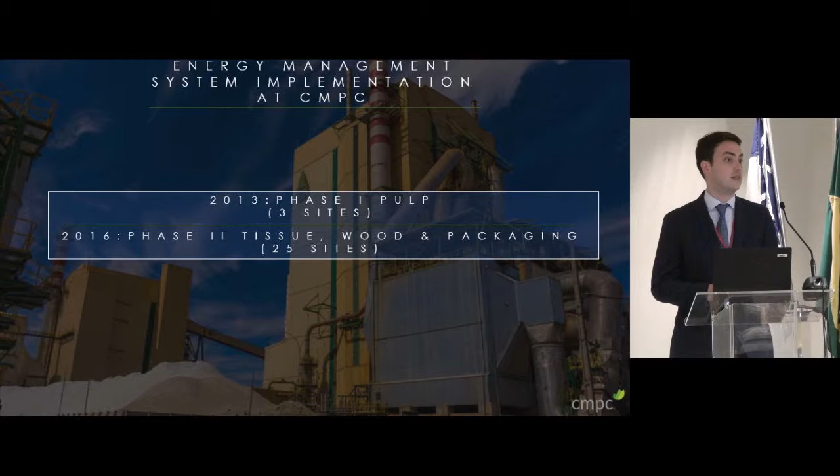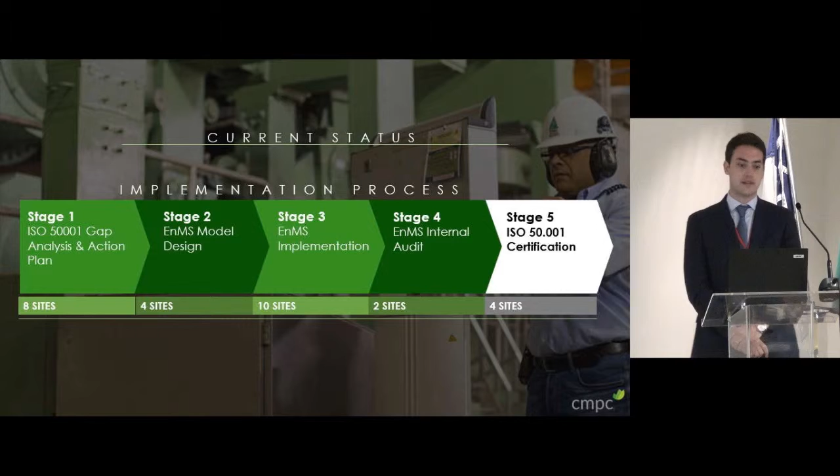So what is our current status in this implementation process? First, we divided the implementation process to have a structure and differentiate the status of implementation in each plant into 5 stages. First is the gap analysis, second is the energy management system design, then the implementation, which is actually putting in process all the design that was done, then an internal audit is executed to adjust all the possible needs that each plant might have, and then we plan to have the certification of each plant.

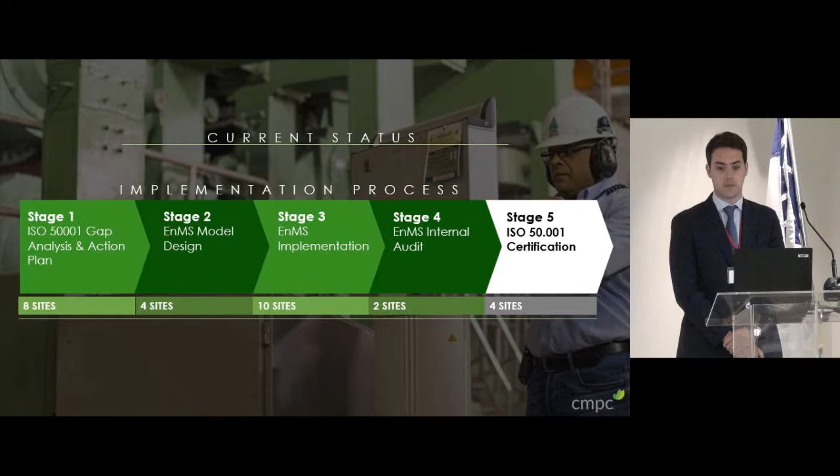At this stage, we have 4 sites which are already certified. Of these, three are the Pulp sites in Chile from phase 1, and 1 is a tissue paper site located in Uruguay.

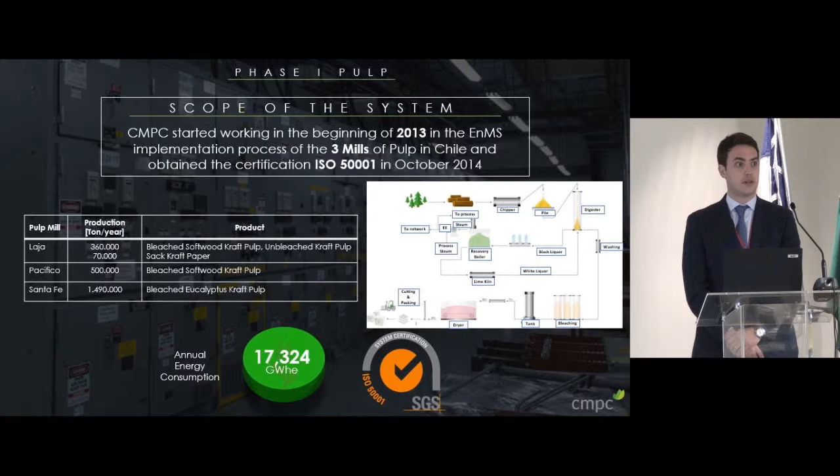As requested by our colleagues, I will focus now on phase 1, which includes all the pulp sites in Chile. So what was the scope of the system in these 3 pulp mills in Chile? These operations consist of over 2.4 million tons of production, and they are located in the southern region of Chile, mainly producing softwood and hardwood pulp. They have a total consumption of 17.3 terawatt hours.

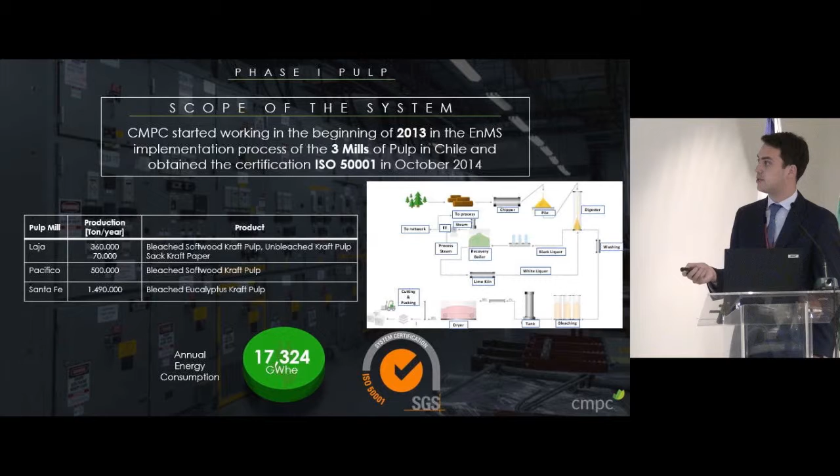What you can see here of the process, I will explain roughly what it is. We receive wood logs from the forest, and first these wood logs are chipped into biomass chips, which are then selected into the main 2 processes in which energy is recovered, because we produce most of the energy in the pulp mills internally. This is because some of these wood chips are not fit to enter the digester and are then sent into the biomass boilers.

Also, the black liquor, which is the output of the digester process, goes into the recovery boilers to produce steam from both the black liquor and the biomass, which is then used to generate electricity, an input to the process that is also exported to the network. As all these processes consume thermal power, the steam left over after electricity production is used internally.

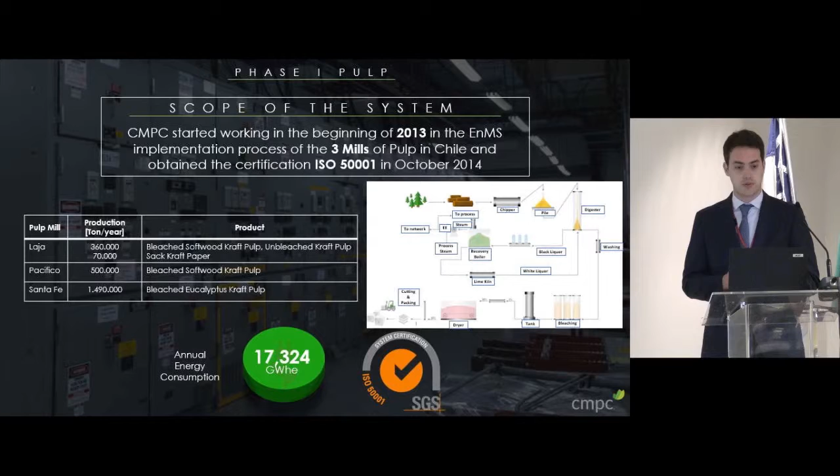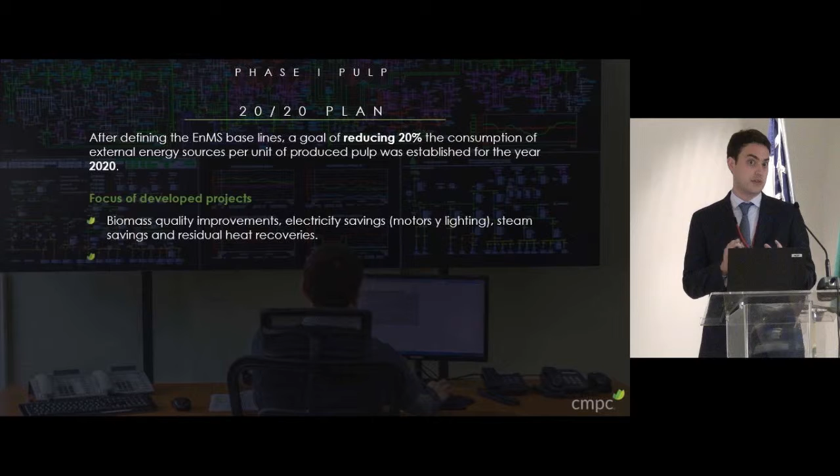Both energies are produced internally, but the rest of the energy inputs, which represent cost for us, are the external energy inputs. That's why we focused our management on the external energy inputs, which represent 100% of our energy costs.

What was our strategic plan in phase 1? We established the 2020 plan that comprehended a goal of reducing 20% of the external energy inputs per unit of pulp produced by the year 2020. This goal was then pursued through different types of developed projects.

Out of these main projects, we focused on biomass quality improvements, focusing on both quality and the water content of biomass. We also focused on electricity savings—what you save in electricity, even though you produce it, you can export it to the system.

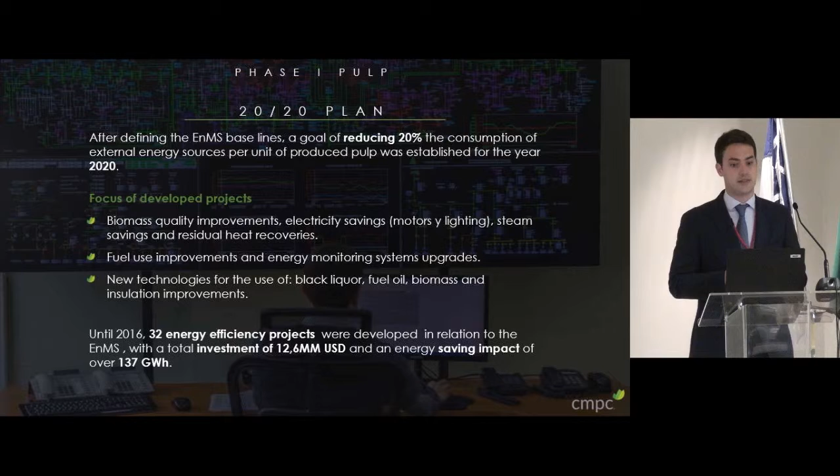Also steam savings. A lot of processes use steam for heat requirements, and some processes, as I will explain later in detail, require heat while others require cooling down for next steps. This was one of the main focuses we developed in our projects.

Lately we have also been focusing on new technologies in the use of fuels, both black liquor and the renewable fuel that we produce, but also fuel oil, biomass, and insulation improvements.

Until 2016, over 32 energy efficiency investment projects were developed in relation to the energy management system, because we also had operational measures, with a total investment of $12.6 million and an energy saving impact of over 137 gigawatt hours per year.

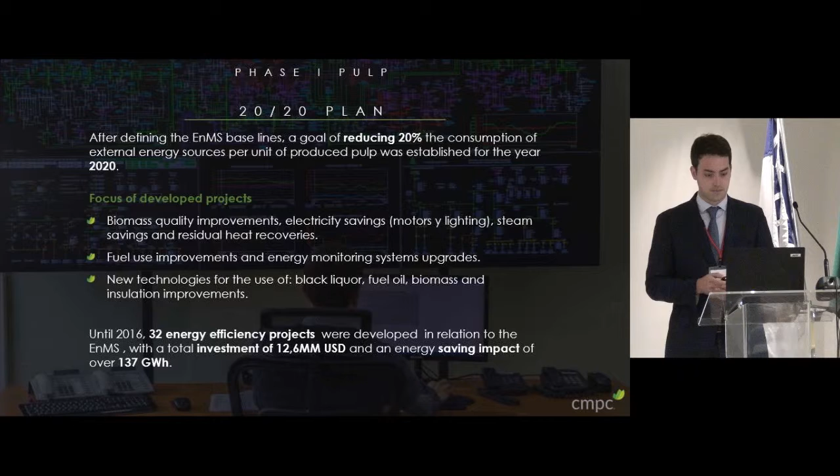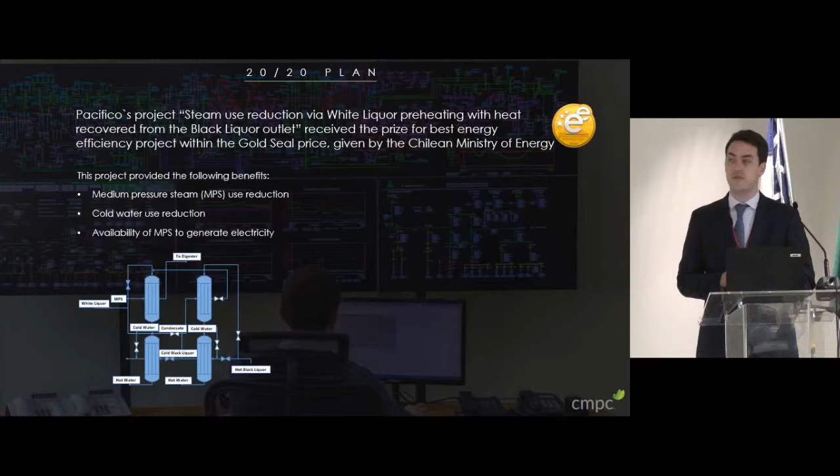As I mentioned, we wanted to distinguish this particular project because it got a recognition from the Gold Seal, given by the Chilean Ministry of Energy. This project was focused, as I mentioned before, on reducing the use of steam.

This project was executed in the main recovery part of the process, which is the digester. We reduced the use of medium pressure steam by combining two streams: the outgoing stream of black liquor was used in a heat exchanger to heat up the input stream of white liquor.

This way, we were able to reduce thermal energy use by 53 gigawatt hours per year, which led to electricity generation of over 17 gigawatt hours per year. This represents an economic benefit of $1.1 million per year, with an initial investment of $450,000. The payback was around 5 months, so this was a quite successful project, which we also replicated in other plants.

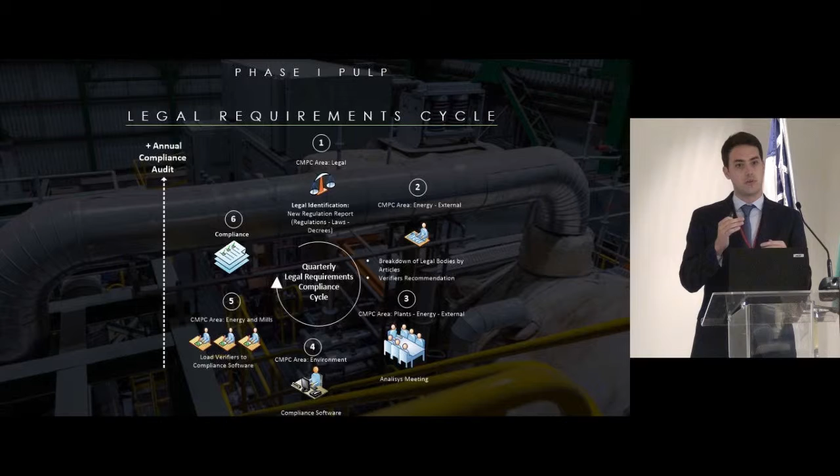One thing we are also overseeing as a central energy unit is legal requirement compliance of the plants. We do this with support from our legal corporate office, which is currently issuing reports on new regulations. We also decided that at a local level we need support from external consulting companies, which help us break down the legal bodies and propose the verifiers for each legal requirement in the energy market.

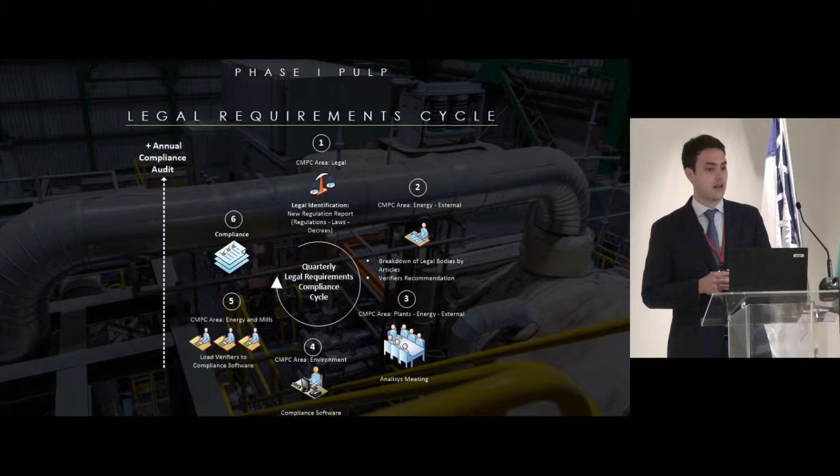We have quarterly meetings with the plants to explain all upcoming requirements from the regulations. Each plant is then responsible for uploading verification of these requirements on a centralized online software. This compliance cycle is finalized each year by an annual compliance audit, also executed by an external company.

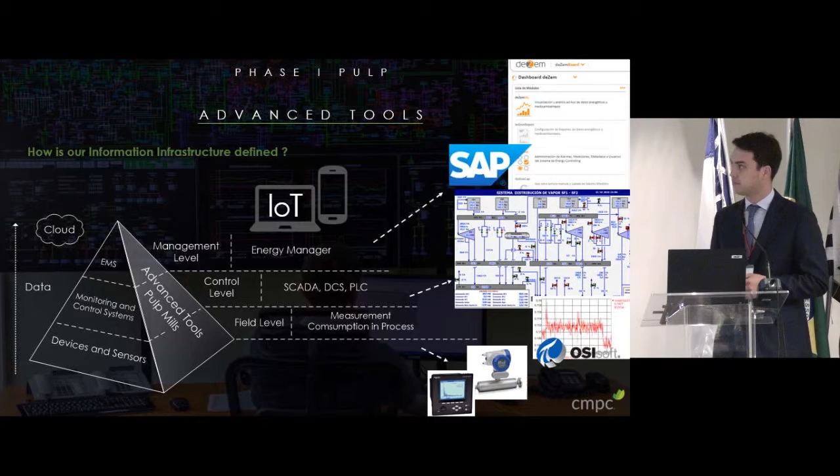Well, what have been the results from all this implementation? In terms of phase 1, we have achieved a 22% energy improvement when considering the use of external energy resources in 3 years since the certification of the 3 plants until 2017. This has led to energy cost savings of over $40 million in these 3 sites, with total investment of $12.6 million.

Well, from our experience with the 3 pulp mills, but also with the 25 other plants that we are in the implementation process with, what are our recommendations and best practices that we want to share with you?

First, we think it's key to have continuous and explicit management support, ensuring resources, meaning not only economic resources, but also time. The time of key people needs to be available. It's not only about having the money and finance resources, but this should also be complemented by dedicated energy managers at a subsidiary level, and in our case we decided to also have one at a central level. This is supported by a clear energy policy which should establish ambitious short-term and long-term goals.

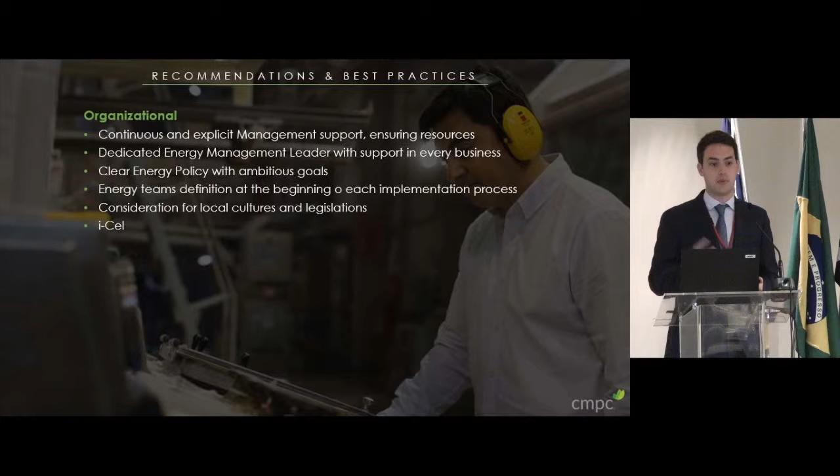In terms of resources, what we have experienced is that it's really important to integrate the energy management system with existing resources. In our case, we have i-Cel, our lean manufacturing operating model, and our current results have improved in terms of management of the system and paperwork, which has been reduced because we integrated everything into this existing lean management program.

This can also be applicable to other ISO standards, TPM, etc. We have also been implementing standardization of all procedures, if possible, at a regional level. Also, it's important to have energy monitoring tools from the beginning, because what you cannot measure, you cannot really improve.

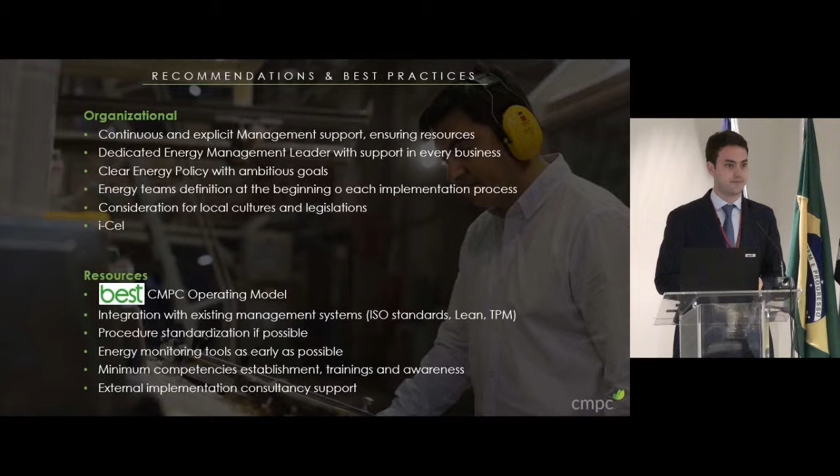We have also been counting on support from external consulting companies. This is important because they can be present more consistently than the corporate office, and we think it's important to count on them and have continuous contact with them. So thank you, that was all my presentation.

Thank you very much, Ms. Marim. As an energy-intensive industry, I believe you have a very long history of improving energy efficiency. Thank you very much for sharing your experience.